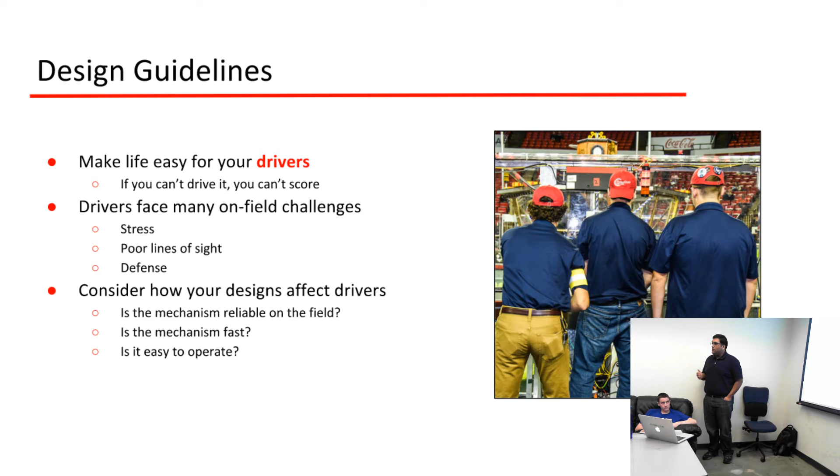Next thing is make life easy for your pit crew. So the pit crew is the crew that hangs out in the pit, and their job is to keep the robot up and running, to keep it maintained and functioning for matches. Now if you design something that's impossible to maintain, impossible to fix, life's going to be hell for your pit crew. So when you put together designs that are really intricate, you have to think about how it's going to get fixed. If this piece breaks, how are they going to fix it at competition?

There's an interesting story right here. For those of you that were there last year, how many of you remember the robot for G3 Robotics? Yeah, you remember, right? So we had a shooter, a ball hopper, a gear mech, but what you didn't notice was under all of that was our electronics. Nobody could access anything. So when a motor died or something didn't work, everybody was like, what's this wire? What does it do?

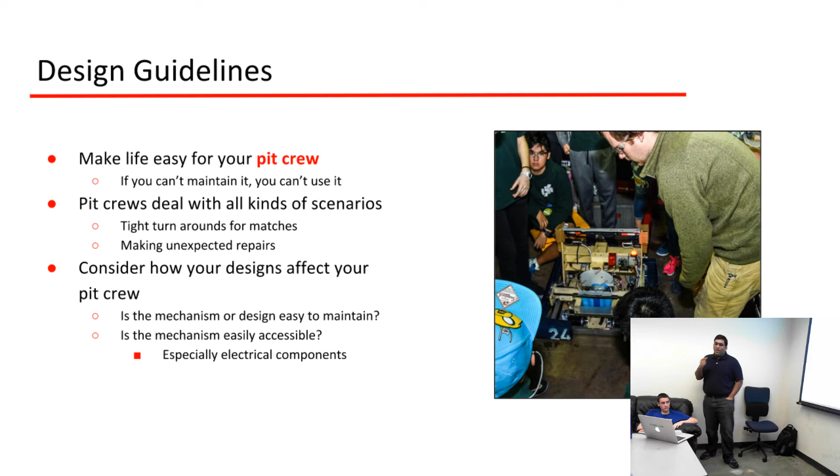All of our subsystems were on top of the electronics, and it made life terrible for the pit crew. We almost always had something wrong. It also made life really difficult for inspections, because inspectors want to be able to trace your wires and know where things are going. So multiple times we had to take the robot apart, pull the top half off just to look into the wires and see what's going on. Make life easy for your pit crew, and make sure your robots can be easily maintained.

The last point is to make life easy for yourself. Assuming you're all somewhat involved in the design process, designing the robots and things like that, don't pick a robot design that you have no idea how to build or that your team has no idea how to make, because then you're just setting yourself up for 6-10 weeks of pure agony. So pick designs and implementations that you know you can build, that you know will be cost effective and realistic.

Now, 6705, you guys were really good at that last year because you built a simple robot that was easy to maintain and it worked really well. So keep that up. Now, drivetrains, general tips.

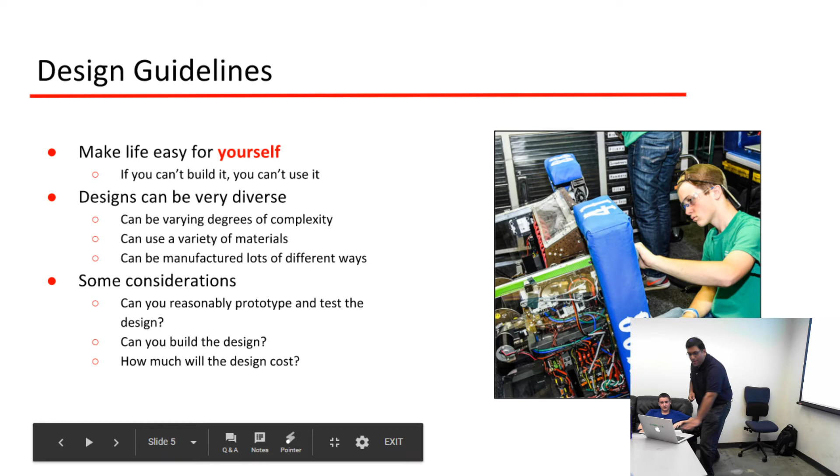You guys used a pretty good drivetrain last year, that was great, but it has to be reliable. If you can't move, you can't play defense. If you can't play defense, you can't contribute at all. So when G3 Robotics went to Worlds, our drivetrain just started flaking out on us, dying almost every other match. And that is the biggest red flag in the world. When your drivetrain starts dying, nobody's going to want to touch you.

Do you guys know what a do-not-pick list is? Do some of the veterans know? Yeah. So when you go to the elimination rounds and teams are putting together their alliances, most teams have what's called a do-not-pick list. These are teams that, for whatever reason, the team doesn't want to work with. Having an inconsistent drivetrain is the fastest way to end up on that list, because if your drivetrain doesn't work, you can't contribute at all.

The second thing is your drivetrain must be competitive. That simply means if you have a drivetrain that's reliable but extremely slow, it's also kind of useless. If you have a drivetrain that's reliable but you can't play defense well, it's also kind of useless. So it has to be reliable, and it has to be robust and competitive.

So this is the type of drivetrain that 6705 used last year, a simple tank drive. There are lots of different variations of tank drive. You have 6-wheel drive, 8-wheel drive, 4-wheel drive with omni wheels, but it's provided for you in the Kit of Parts, and it's by far the most popular.

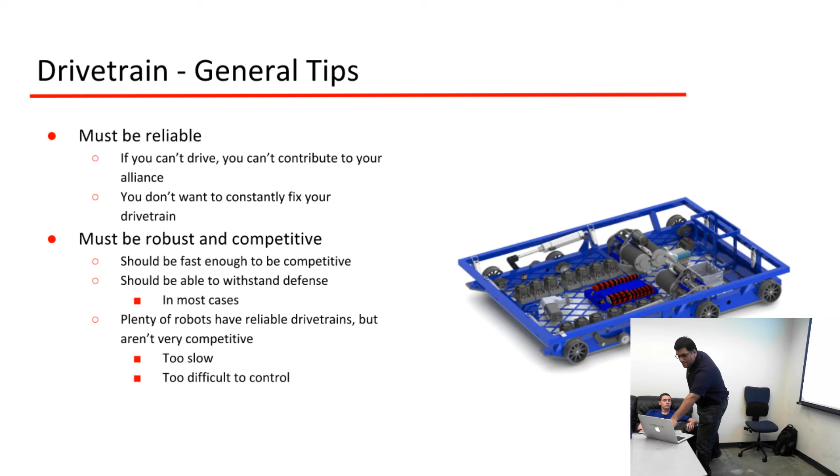Now this is a Mecanum drive. How many of you saw Mecanum drives last year? Yes? What did you think of them? The one that stood out the most was probably Circuit Runners. Their robot was very fast, and it had Mecanum, so it could go pretty much anywhere very quickly. Circuit Runners were one of the few teams that actually pulled Mecanum wheels off rather well.

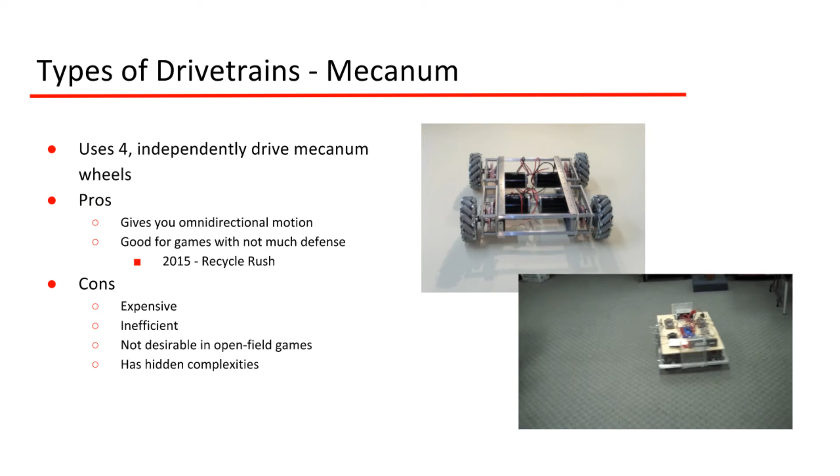If you can't see that little GIF down there, the robot's able to go back and forth, but it's also able to strafe. That means it can go forward, backwards, turn, but then also do side-to-side motion. It's a pretty powerful motion.

The downside with Mecanum wheels is that they're heavy and inefficient, since each wheel has to be driven independently. Each wheel costs like $100, so if you're putting together two robots' worth of Mecanum wheels, it's going to add up. Now Wheeler always uses Mecanum, and they got it right this past season, but more often than not, teams manage to not get Mecanum wheels right.

So this is one topic where I'll be frank: my team will never do Mecanum wheels, ever. They're too inefficient, too expensive, too much of a headache to figure out. So we will never do Mecanum wheels. But there are instances where they might be a good option. Last year, Wheeler had it figured out, so Mecanum wheels were a good option for them. Does anybody remember the 2015 game?

Kind of, I've heard of this. Yeah, so it was a game called Recycle Rush, and teams had to stack totes.

In the past 5 years, it was probably the worst game FIRST has ever come out with. But with that being said, there was a huge divider down the middle of the field, so there was virtually no defense that year. Teams that had Mecanum wheels were objectively better than similar designs with teams who didn't have Mecanum wheels. But that's something I don't think we'll see again anytime soon.

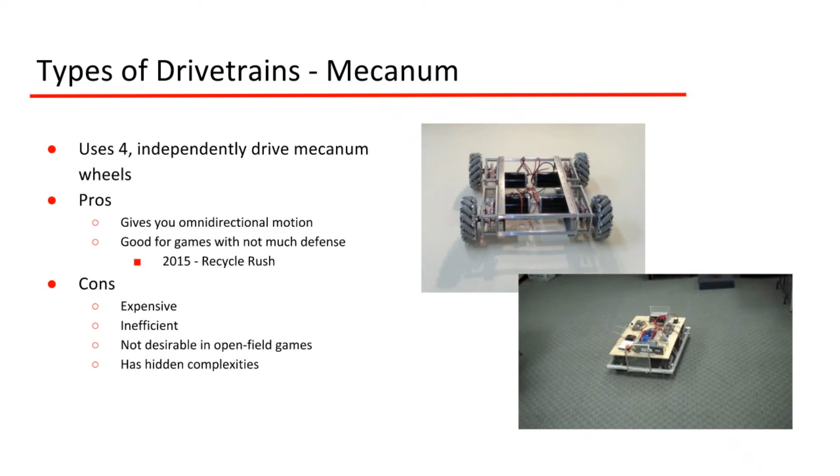Okay, swerve drives. I don't know if any of you saw these, but that's what a swerve module looks like, all the way in the corner. What you have is one motor actually driving the wheel, physically rotating it, and one motor turning the wheel. So what you get is independently driven, independently steered wheel modules, and it lets your robot do crazy stuff like that. And there's no loss in efficiency.

It's still pretty heavy, and it's very complicated. So that's why if you're going to try and do Swerve - which please, I would recommend against it - but if you're going to try it, it's a very powerful drivetrain. So do it in the off season.

Between now and January, you have 3-4 months. If you're going to try and do Swerve, buy the modules, put them on the Kit of Parts drivetrain or something, and just see how it goes. But it's a great drivetrain if you can get it working right, and that's a big if for a lot of teams.

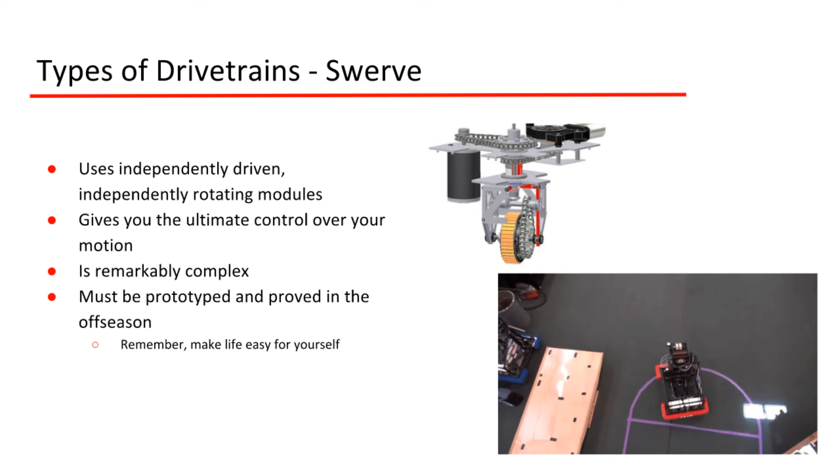Now, which one to use? Did 6705 use the Kit of Parts drivetrain last year? Yeah, that's a great choice, because it's there, it's free, it works almost all the time. And if you're even 1% unsure about whether or not to use it again this year, do it. There's no reason not to.

So the point is not that you want to go faster, but if you want to use a Kit of Parts drivetrain, it lets you do virtually whatever you want. And AndyMark is actually pretty quick to adapt to the game. Two years ago, a lot of teams wanted to use pneumatic wheels, and there was no easy way to hook them up to the Kit of Parts drivetrain. So AndyMark quickly put together a kit and said, if you want pneumatic wheels, here's what you need - you just go order it, and bang, you're good to go.

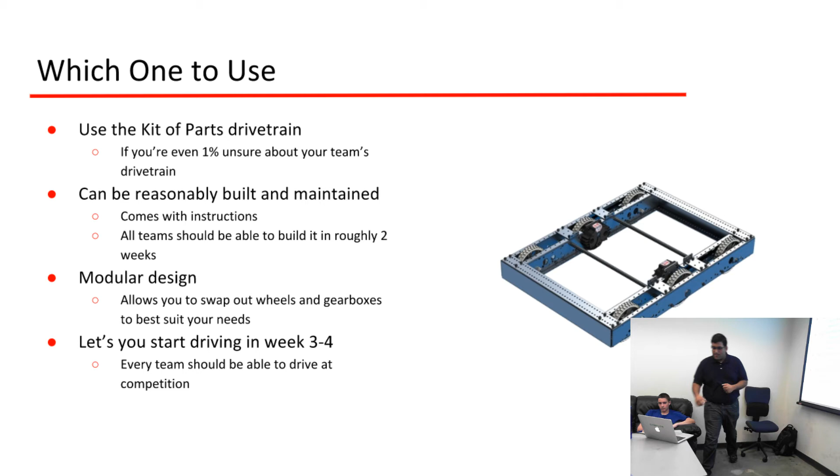Oftentimes there's multiple places to get the object. You can either get them on the field or from the human player station. Like this past year, there's been a trend where getting it from the human player station is just easier, so a lot of teams go for it, which is what you guys did. But picking it up off the ground is often just a little faster, a little more rewarding. So we're gonna talk about each of those options.

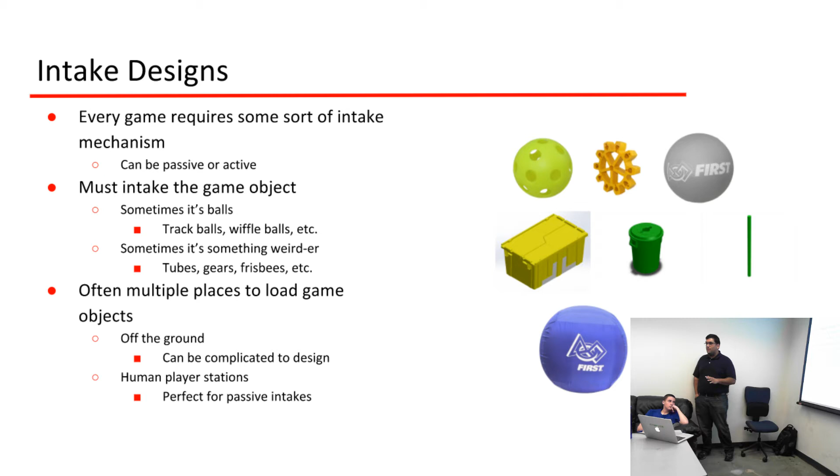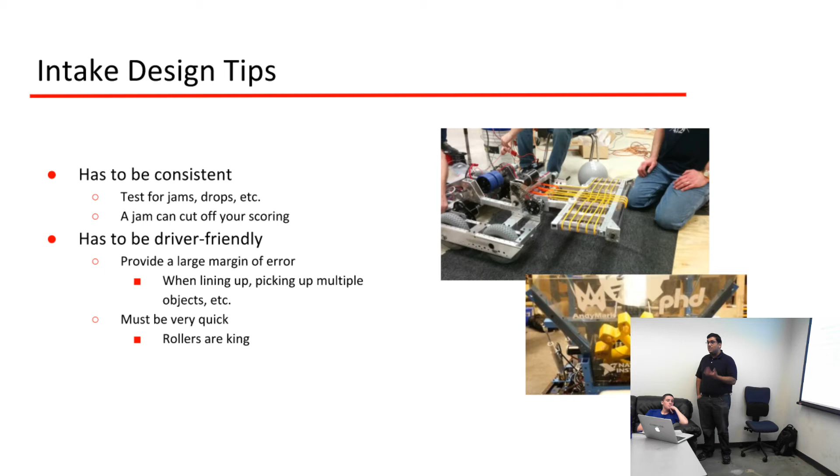If you're gonna build an intake, there are 2 guidelines. First, it has to be consistent. If you were on a team last year, you know that if your intake system jams or something goes wrong, you're done - you pretty much have to start playing defense because you can't score anymore. So it has to be extremely consistent and driver friendly. Remember, your driver is across the field and can barely see what's going on. If your driver has to be exactly positioned to pick up your game object, it's not going to work at all.

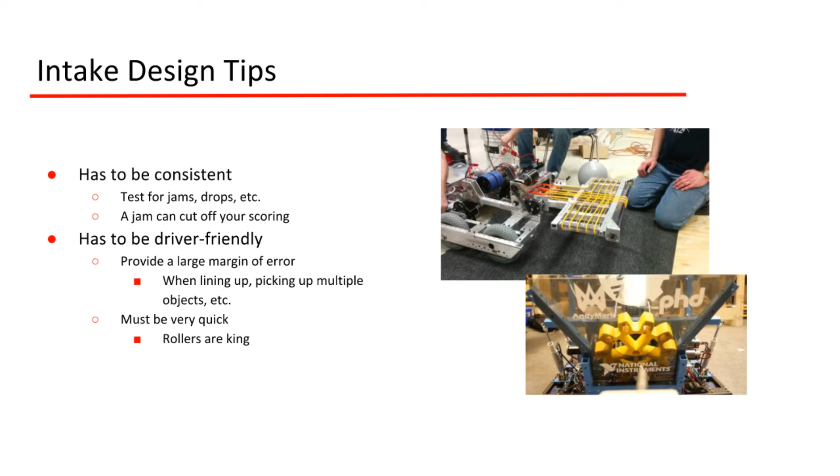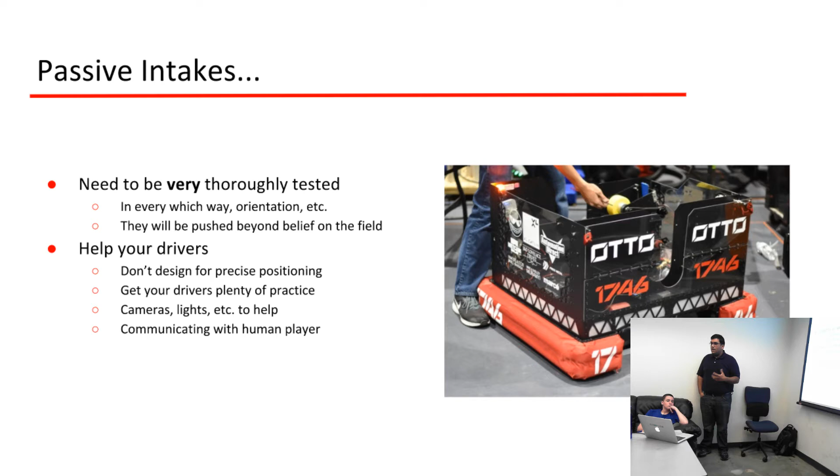Passive intakes are things where nothing actually moves, which is what you guys did last year - you just drop the gear in and pull it back out. But passive intakes can be very deceiving in how simple they are, because you just throw together a simple frame and it kind of works. The thing is they're deceptively simple, because if you don't think about every variable - differences in height on the field, the speed of the game object coming in and out - passive intakes won't work.

That's why you saw a lot of teams do variations - if you look at 1746, they actually have a hinge on their passive intake that opens up. So what that does is when a gear comes out of the human player slot, it almost always went in perfectly into the robot.

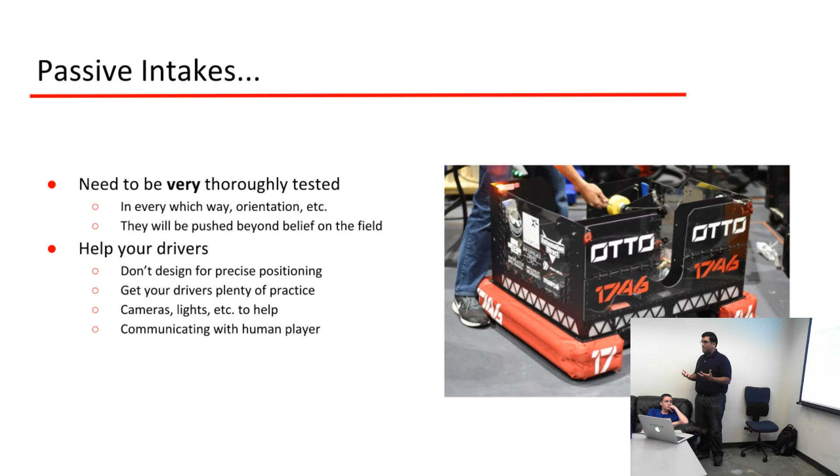Passive intakes are good because they're simple - you don't need motors, you don't need any sort of programming. But you have to test the crap out of them, because you're going to show up on the field and everything will go wrong. If you can test them in your shop and solve all the variables there, the passive intake will work a lot better when you show up on the field.

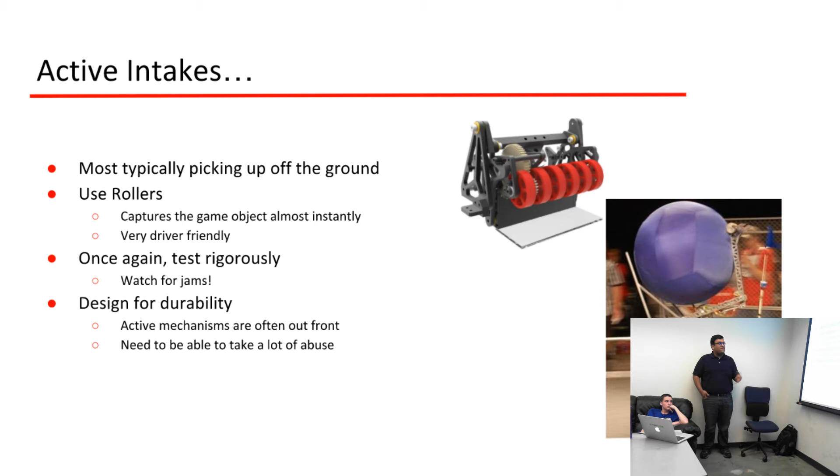Now, active intakes. Active intakes are what they sound like - you essentially have some sort of rollers or something that pick up the game object off the ground. So once again, you have to test very rigorously, and there's a key to active intakes: always use rollers. Rollers are essentially wheels on your claw or whatever, and they will go in and suck up the game object.

So if you've been paying attention, why are rollers better than just a regular claw? Any ideas? Better grip, more reliable, any angle, less precision required for the driver - you were all right, but that is ultimately the point: less precision required for the driver. If you have a claw, the driver has to go up to it and then grab it, but with a roller system, the driver can just ram into it, get it, and then go back. The driver doesn't really have to think about closing the claw or anything - they can just go in and get it.

There's an interesting story for that, actually. Anybody know what year that robot's from? That's 1114 in the bottom right corner. It's a while ago - it's from 2008, a game called Overdrive. Now that ball they're holding is 40 inches in diameter, about - which is huge, it's 4 feet.

Almost every team that year was using some sort of claw - they would pick up the ball into their catapult, and then go and shoot it. That team managed to package their solution into a roller. So what you see at the very top is a roller that pulls it into that little claw-like mechanism. In my opinion, that was the difference for them - that was what allowed them to dominate and essentially not lose a single event that year. They won 3 regionals, they won worlds.

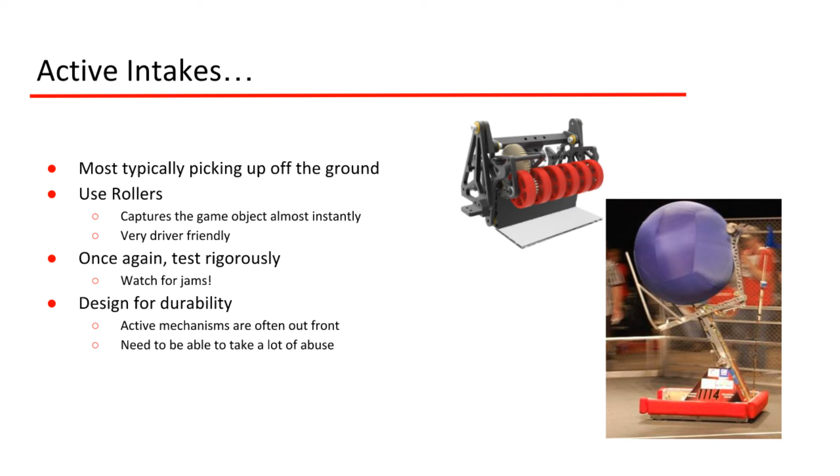I don't know if you guys have ever seen these robots around at demos, things like that. But essentially, the goal is the same: you pick up the ball and you have to shoot it somewhere.

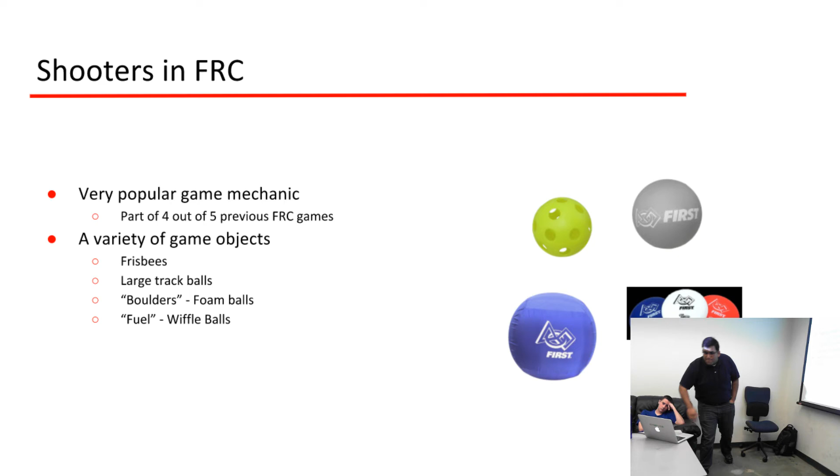When you're dealing with large game objects, catapults are kind of people's go-to. The trick with catapults is often just keeping the ball secure in the cradle. With that robot, the way it's set up, the ball might not be terribly secure in the cradle, so if they get hit from the side or something, there's a potential for them to fire a shot off wrong, or the potential to actually lose the ball.

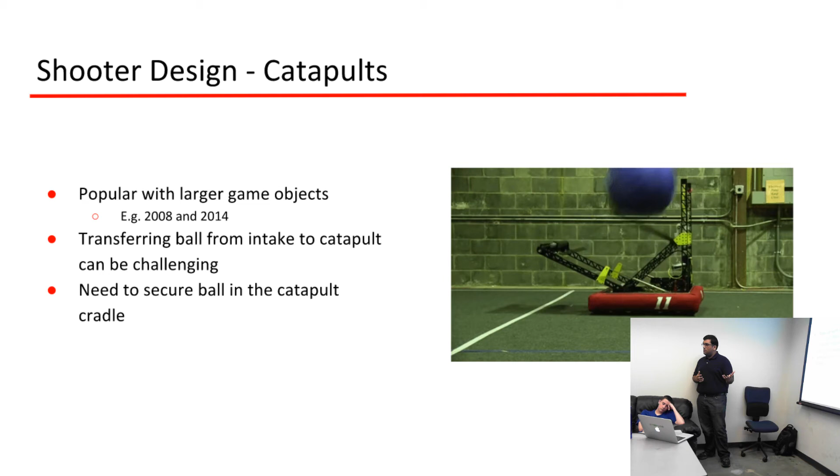But if you actually design a catapult, there's two ways to go about it. The first one is pneumatics. This is getting into a little bit of detail, but if you just hook up your basic single pneumatic cylinder like that, chances are it'll give you that shot, but it won't be very powerful.

There's two things you need: first is strength, meaning adding more and beefier pneumatic cylinders, and the second is a high flow rate. How many of you are familiar with pneumatics?

Nobody, great. So pneumatics essentially have a cylinder, which is this puppy right here, and the second thing you have is a solenoid. The solenoid is what's physically pushing the air into and out of the cylinder. In order to get a good pop from the cylinder to actually shoot a ball, you need a very high flow rate solenoid. So these can be kind of expensive.

But if you can get a pneumatic catapult working, especially working well, you don't have to worry about tuning it, making sure the bands are the right strength or whatever. Once this system's working, it's working. That's why this is kind of the ideal solution in my mind.

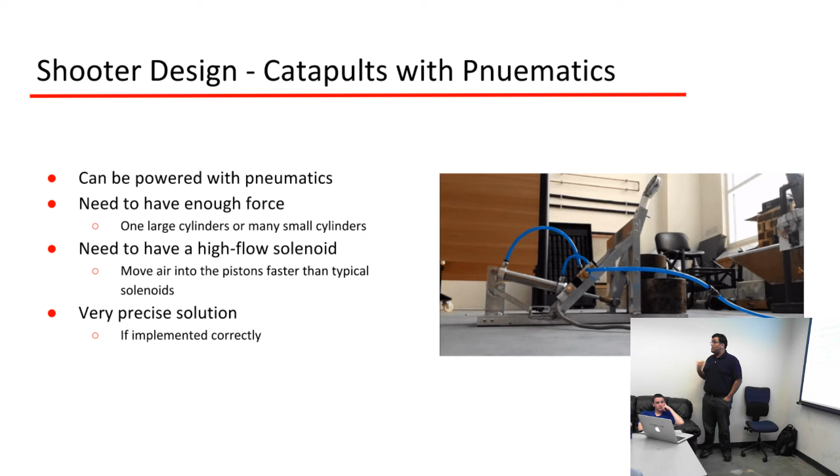But people also love to go the whole tension-and-release route. What you need is essentially a catapult that has tension on it. In this one, the tensioning bands are right here, and the catapult's actually in its firing position. And you need something that'll pull the catapult down.

But it's not enough to just simply drive your motor backward and let that thing fire. You need something to actually physically release that pressure, so you need a mechanical release. There are lots of ways to do mechanical releases. The best, most consistent one in my mind is the shifting gearbox. You'll have to do some playing around depending on the force, because if it's an extremely high force, you'll need to reinforce the gearbox and make sure it shifts stronger. But that's another option.

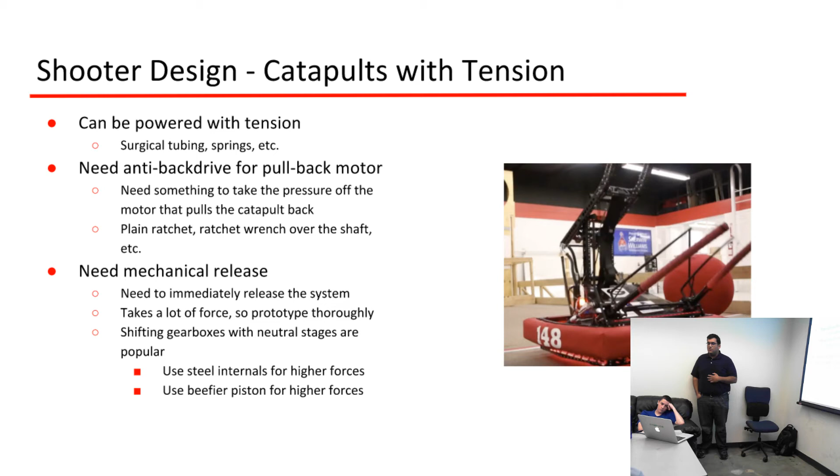Finally, a wheeled shooter design. Hopefully some of you saw this last year, but this shooter type has a lot of variables, and that's probably the hardest part about creating a shooter like this - you have the wheel type, the compression, the flywheel, the motors. What combination of those is going to work for your game object? The only way to really figure that out is to prototype.

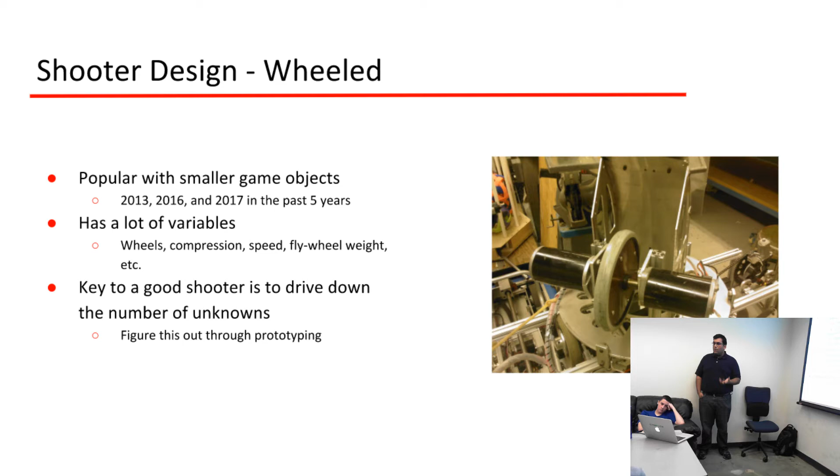Prototype, prototype, prototype. Looking at wheel type and compression, softer wheels are very grippy, but they tend to wear quite a bit. Harder wheels don't grip as much, but they won't wear as much either. In 2013 with the Frisbees, the pneumatic wheels up against the kind of rigid Frisbee gripped really well and shot amazingly. For some reason my team did not opt to go that route, but a lot of teams with Frisbees went with the pneumatic wheels.

Compression is just one of those things you have to play with. If the compression's too high, you'll slow down the wheel too much and your shot won't be good. If it's too low, your wheel won't catch the game object, and your shot won't be good either. So these are just guidelines - you have to play with it. My team last year, we spent about 2 weeks just playing with different wheel types and compression to figure out what's going to work for us.

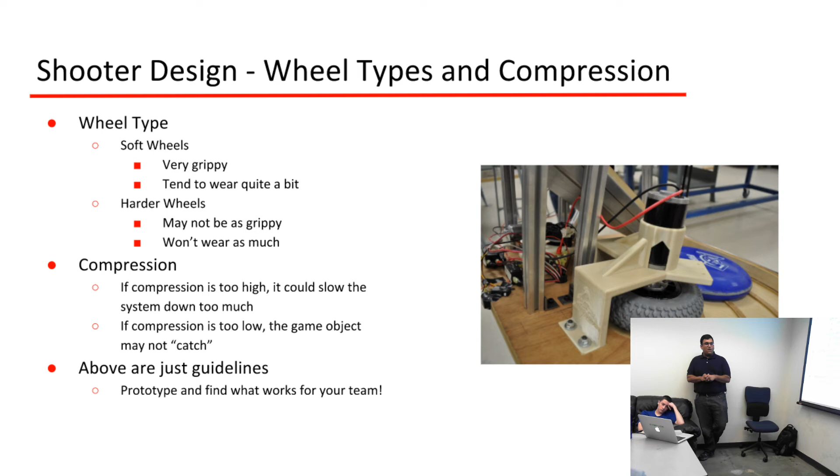Okay, now flywheels and motors. This year you probably got a chance to see some teams that shot a ton of balls. For you rookies, last year teams had to shoot wiffle balls as well as score gears. There were some teams that could shoot at an insane rate - we're talking maybe 5-10 balls per second.

The way they do that is by balancing a flywheel weight, which lets you keep the speed of the shooter wheel up, with the motors, which provide the power for keeping the shooter speed. The balance comes in that if your flywheel weight is too high, it's going to take forever for your shooter to come up to speed. But if you have too many motors, your shooter system will take too much power away from the rest of the robot. So the balance is that you want a shooter that spins up quickly and maintains speed, but doesn't kill the rest of your robot.

This also comes with a bit of prototyping and a bit of experience. You have to do what you're going to do and see how it goes.

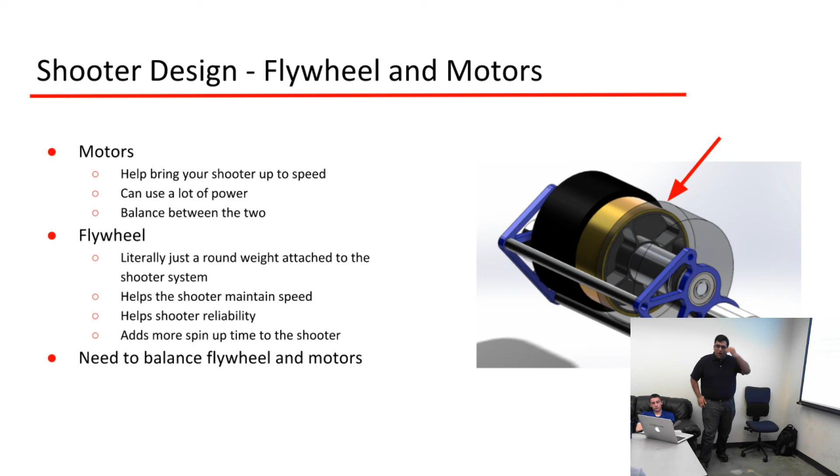All right, climbers. Climbing is a pretty commonly used end game tactic. For those of you who are new, the end game is like the last 30 seconds of a match - that's usually when the core game dynamic stops or pauses and teams shift into climbing or things like that.

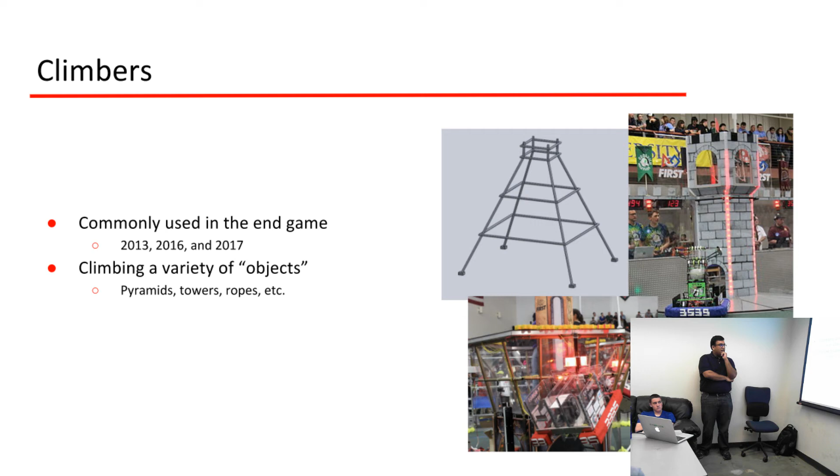First step for climbing is grabbing. This is typically the hardest part of the challenge because usually the bar is very high, so you have to come up with an arm or something that'll reach up and grab the bar, and then pull yourself up. But the thing that kind of broke the challenge last year was Velcro - you could just use Velcro, grab onto the rope, and you're going up. In previous years it wasn't that easy.

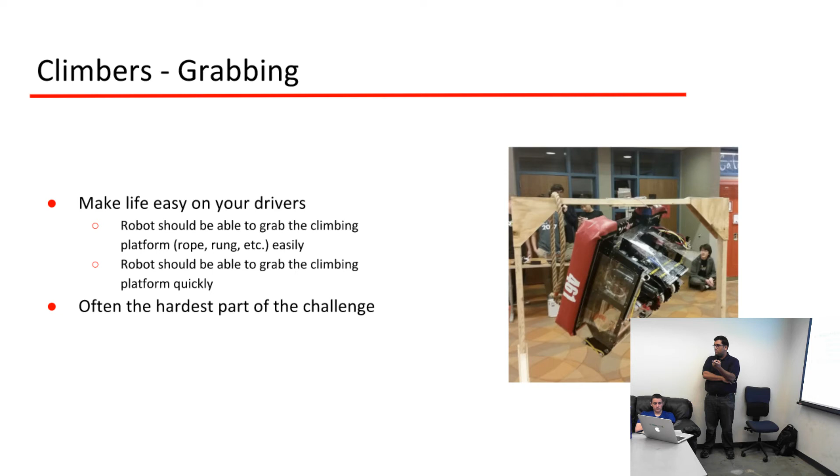Assuming in the future that climbing challenges will be somewhere in the middle - not as easy as last year, but maybe not as difficult as previous years - you're going to want to make sure you can grab onto the climbing rung very easily. It goes back to your drivers - you want to take pressure off them, but you also don't want it to take that long to grab on. I'll talk about this in the next slide.

If you're looking at the GIF, that's Team 254 out of California. You notice how they climb that thing in about 6 seconds. You have to understand, most teams could not even make that climb. My team that year, we could maybe get onto the first rung. These guys are just like, bam, we're up.

It's pretty incredible. Now the point here is you have to climb in a reasonable amount of time if you're going to try to climb. Don't be one of those teams that has a 30-second end game and takes 25 seconds to climb, because A, that's kind of annoying - if they miss their window to climb, they're stuck halfway up thinking 'I could have gotten the points.'

But B, I'm sure you guys noticed that in the end game there's a lot of rushing around. As teams go to climb, there's less robots on the field, so you have a little more room to maneuver and maybe score some extra points. So you don't want to be one of those teams that just takes yourself out of the game right at the 30-second mark.

You want to be able to maybe go get one more game piece and score it, so climbing quickly is pretty important. Now, if I had to put a rule of thumb - last year, did you guys have a time you were aiming for, how quickly you wanted to climb? Not really. So last year, I think our team wanted to be able to climb in about 5 seconds: 5 seconds to grab the rope, and another 5 to climb. So that means we wanted to execute our climb in under 10 seconds, which I think is a fair rule of thumb.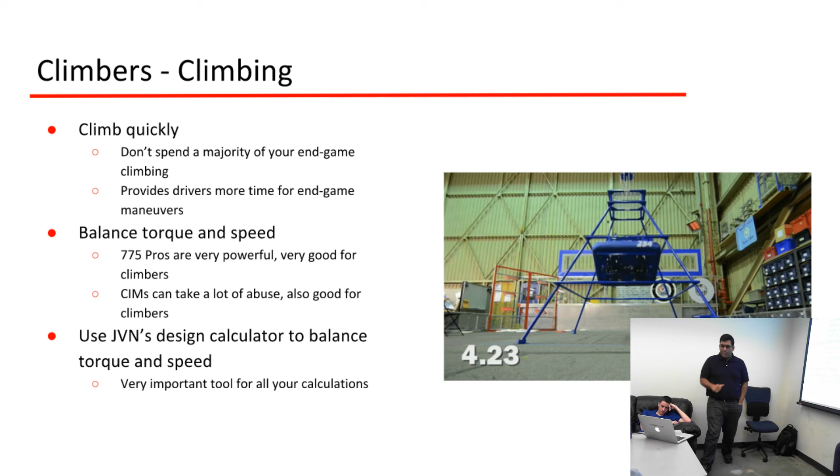Finally, staying up. Did you guys use a ratchet to stay up like everybody else? There were some teams last year that didn't stay up - it's kind of weird, they went up, hit the touchpad, and as soon as the game ended, they fell back down. Not hard, but they fell. You can kind of do that as long as you don't damage the robot, and obviously stalling motors is never good. So if you're going to climb, use a ratchet, use a wrench - these are very common things teams use to not backdrive, to not fall. These things are like $2 at Home Depot, there's no reason not to have one.

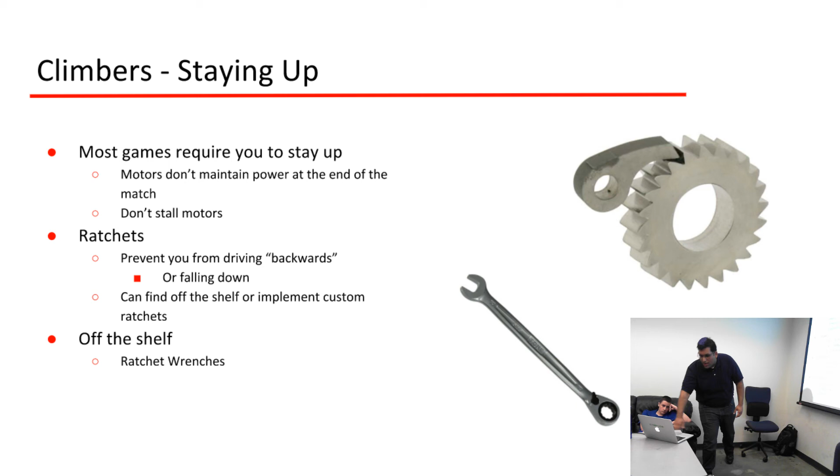Each one of these things can be broken down into their own presentation, because there's 20 years of FRC to go look at, and there's a ton of really good drivetrains, intakes, shooters, and climbers. So 67 and 5, you guys are in your 2nd year this year. There's a saying in FIRST that's become really common now - nothing is new, which is a pretty common saying in general. But while the games themselves don't really get recycled, the challenges kind of do. So if you find yourselves wondering how do we do this, chances are a few years ago a very similar challenge was offered to teams, and a few teams came up with some good solutions. So it's always worth a good look and research.

So with that, that's the end of my presentation. Not that painful, hopefully. Are there any questions about anything - about the guidelines, suggestions, any comments? Any questions online? Nope.